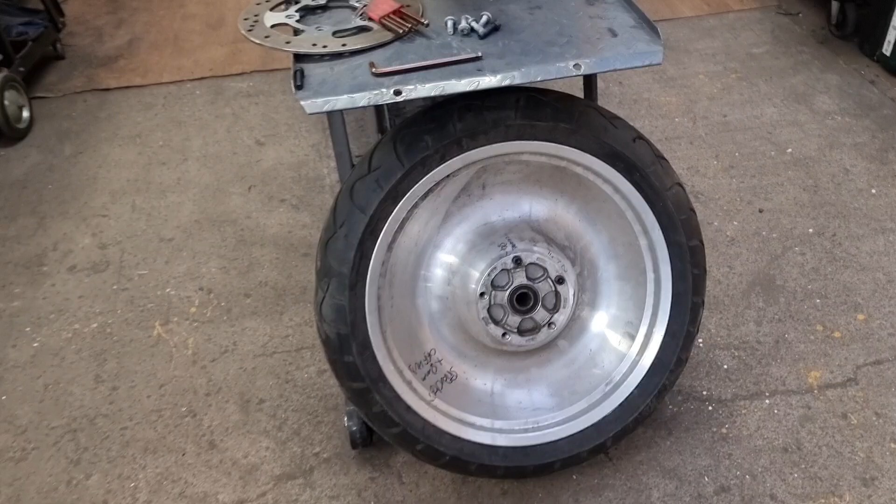Part 2 of our car's high neck Sportster wheel adapter sprocket build. Let's do it. Right, so we made an adapter that fits on the wheel to take the Sportster sprocket and set it out the right distance to line the drive line up. We now need to machine the holes in it to bolt it down. And there's a few ways of going about doing this and calculating this.

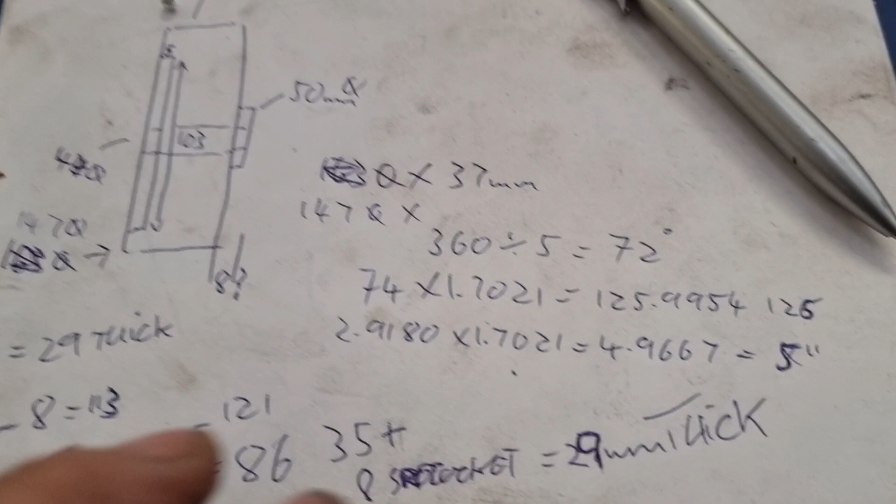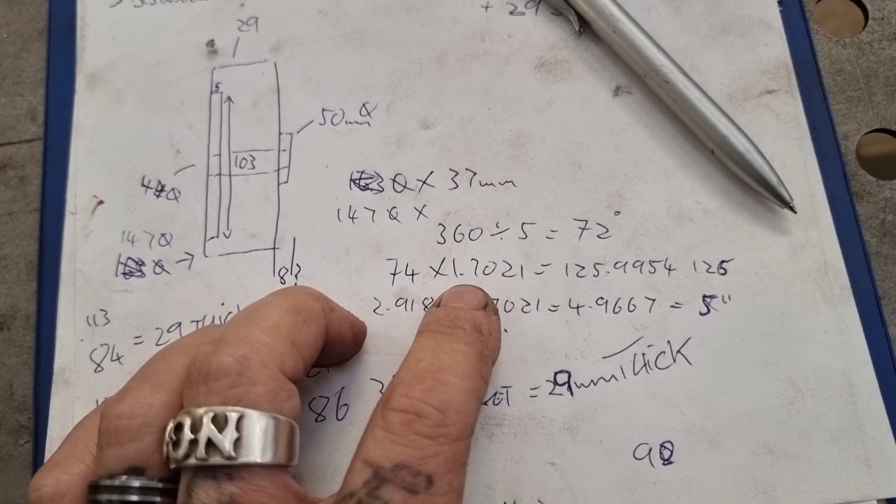We need to find the PCD for a start off. So there's a formula to work that out, and we measure the distance between the middle of the studs, which was 74 mil, near as fuck it is to swear in, or 2.918 in inches. What we do, we multiply that by 1.7021, and that gives us 125.995, so 5 microns off 126. Yeah, that's the PCD, the pitch circle diameter.

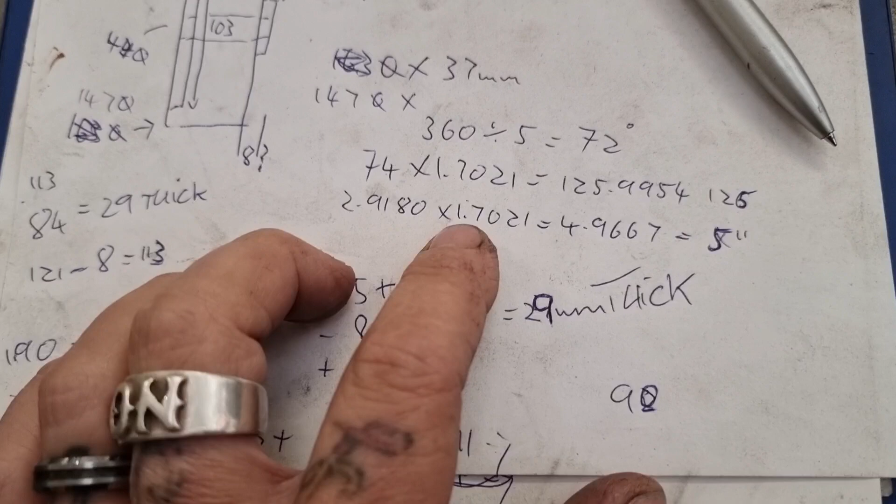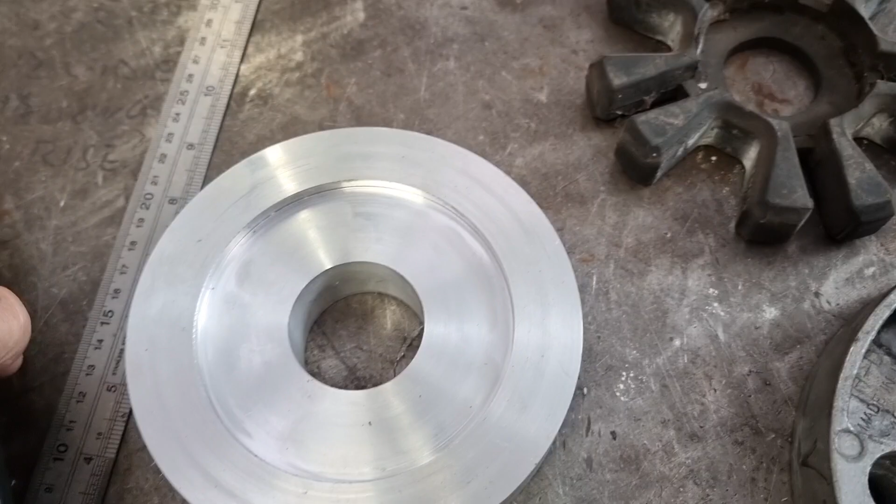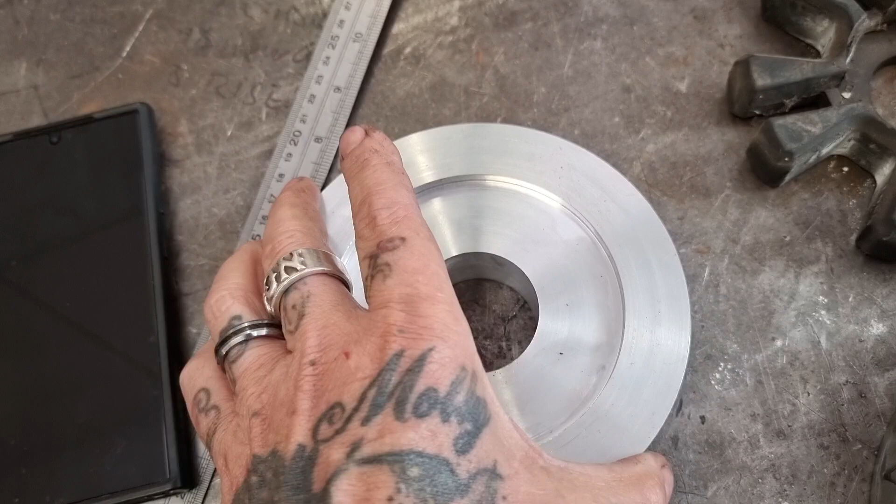Then we need 5 studs, so we divide 360 by 5, which is 72. So we zero everything off, make a hole, rotate this 72 degrees, do another hole, so on and so forth until we're back at the start. That, apart from the maths, setting this up on the rotary table and centering it and moving it out is a lot of fucking about, setting up, a lot of faffing about. So I think, look at the sprocket side, look.

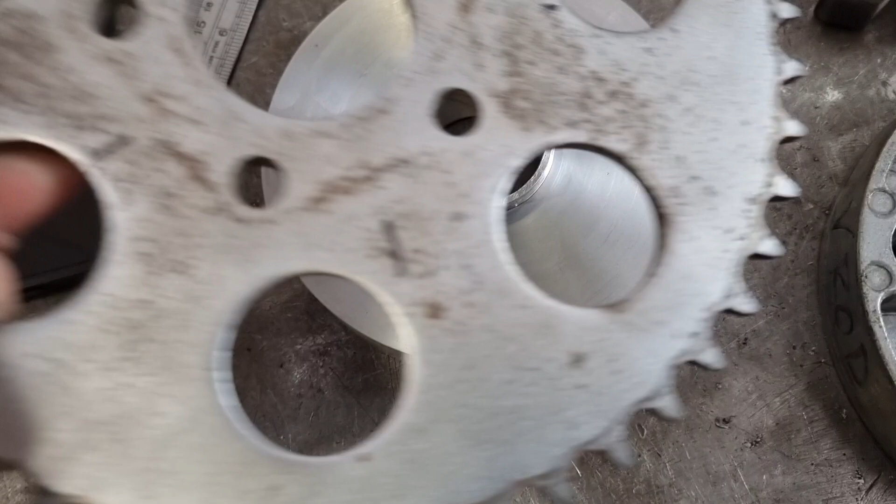What we're going to do with the sprocket side is none of that maths and none of that fucking working out. We're going to lay the sprocket on, and then we're going to transfer punch through, and that'll get us all the holes. Yeah, no maths, no marking out, no measuring, no fucking doing anything. Unfortunately, all we've got as a reference is this cush drive, and we can't center that on there as it is. That's not going to work.

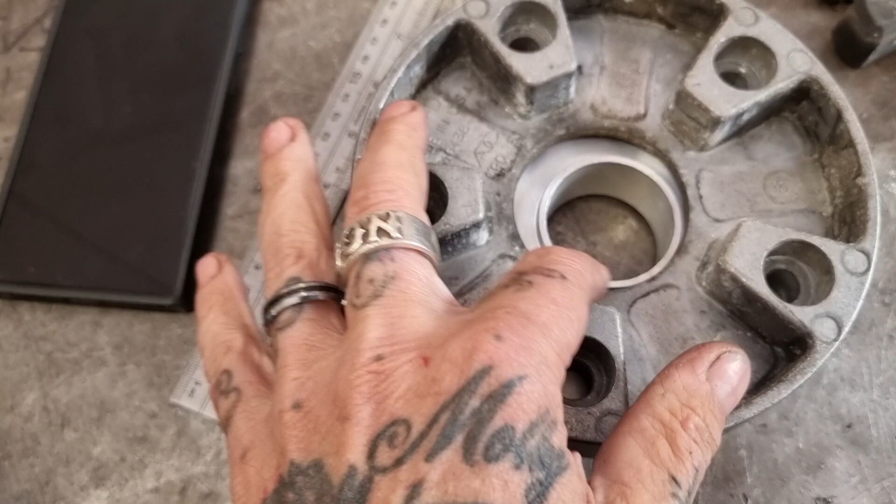So we've got two options. We can go for the rotary table setup, the full engineering job, which is a bit of a fuck about, like I've just said. It can take an hour to set it up on the rotary table, or we can just make a little adapter, a little mandrel that sits on there. Yeah, sits in that. The outer diameter is the same as that diameter, and that will centralise that on the adapter, and we can transfer punch that through, which is probably what I'm going to do. So 10 minutes on the lathe as opposed to up to an hour on the milling machine setting up, and then we can go from there.

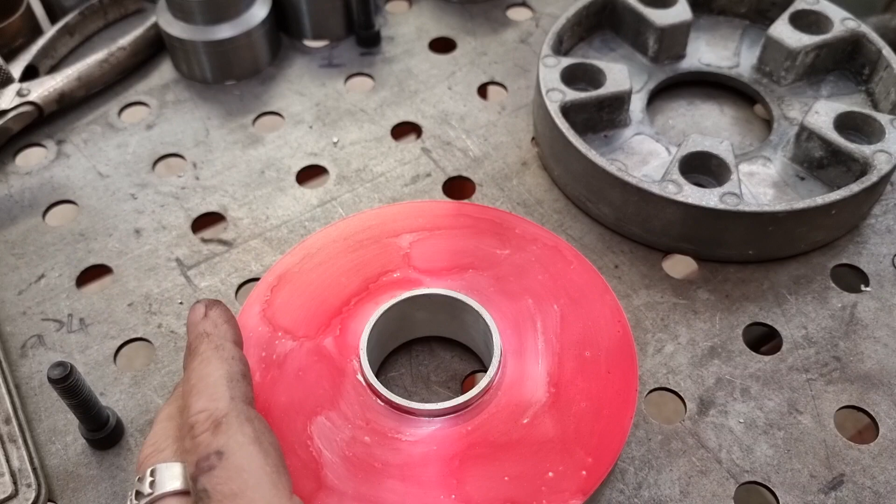Righto, so we've had a brew and we've had a weigh up of the shit involved doing each way of marking, drilling and tapping these holes. And I think we're going to rule out the rotary table. I think it's too much fucking about. I did consider it in case we end up shaping this to lighten it, but I think we're going to have a conflict with where the holes are when it comes to scalloping out. That will show later on in the process.

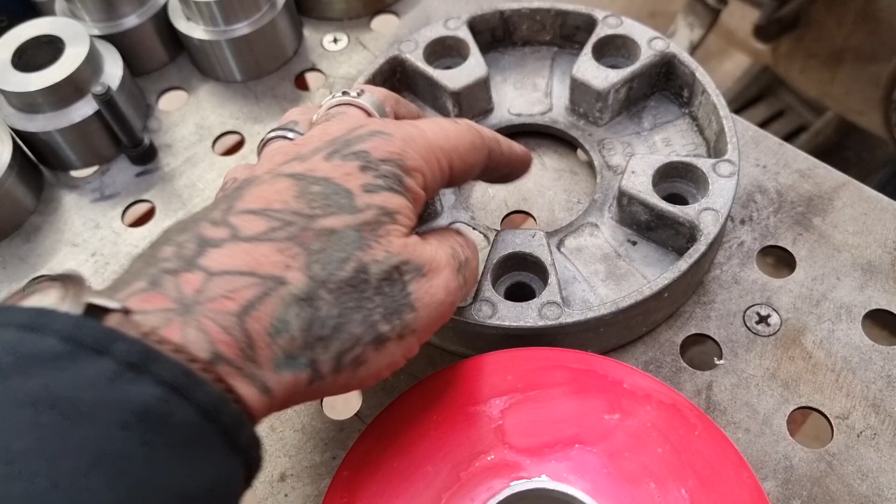So we're going to go with the mandrel. We're going to make a mandrel that fits over that flange and is wide enough to sit in there, creates another flange that sits in, and that drops on there, and we transfer punch through. I think that is the way forward, I really do. So let's get on and do it.

So we've got this chunk of material off. Hold on, let me just put the jaws away. And I don't mean false teeth, because we've gone back to the normal internal jaws, because we're gripping something that we can manage, and we are just going to face it up. Now I'm going to be boring a hole in this, so a lot of it is going bye-byes, but at the same time it'd be nice to have a good reference to start from. So here we go, let's just chop that nice and smooth.

And then we need to turn the OD down to fit inside that cush drive doodad, don't we? So we'll get a touch on, and we'll take a very light cut. Just checking everything's moving in the right direction, and then we'll have a measure and go from there.

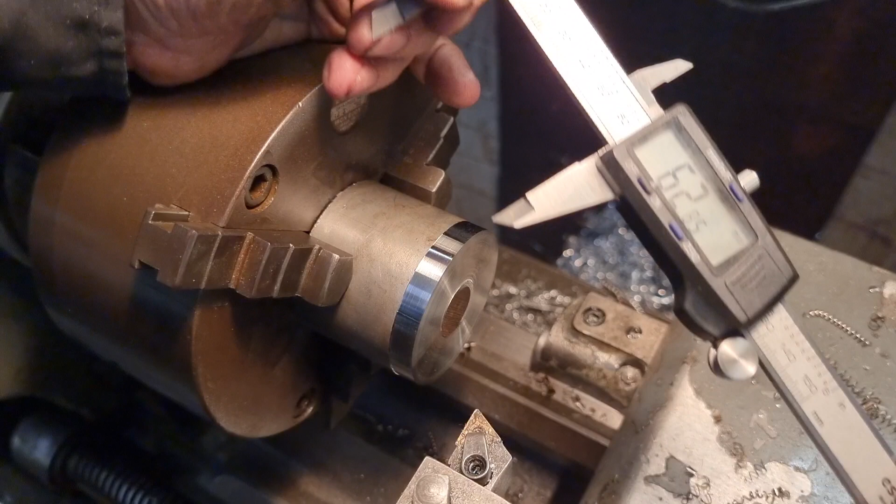Right, that is 62.85, so we'll set the digital readout. X is 62.85, enter, and we need, oh, it's really difficult to measure, but we've got 60.5, so let's take this down a bit. That's 61.6. It only needs to be about ½ inch long as well, so we don't need to go mad with this. And now we'll go 60.7. I want to sneak up on it.

I want it to be a nice fit. So we'll have a try. We'll go 60.7, look, like this.

Lovely bit of steel, this is. Cheers our Gilbo.

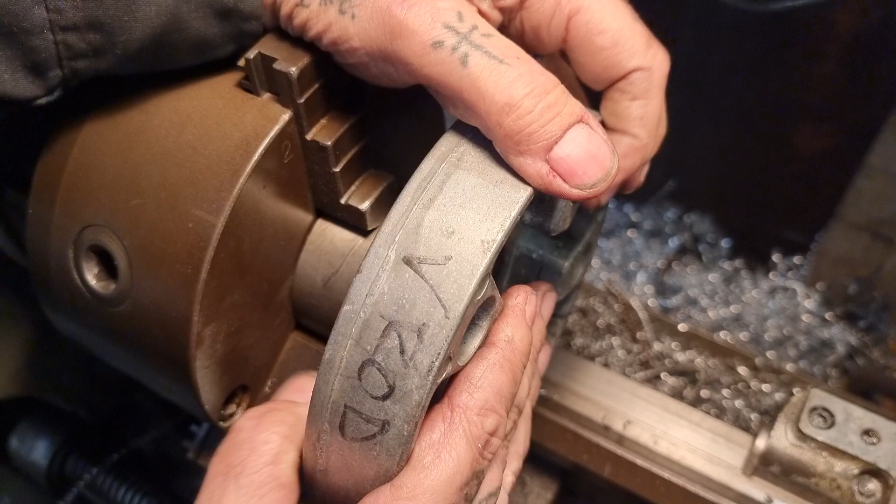60.7 at that. Right. We'll break that edge. And we'll hope there's enough clearance. Oh, there's loads of clearance on the bed. So that's 60.7. It almost fucking goes on, Ralphy. Like, almost goes on. So let's go again.

60.65. It's not got to be a press fit like. It just needs to fit. 60.65 there, look. Which shouldn't have done too badly. And where are we at now? Fucking hell, it tightens up. The problem is that this hole is not perfectly fucking round. So unless I'm gonna chuck this up and bore that out, I'm gonna make do with this.

So 60.7, 60.55, let's try that. See if that gets us a shove on fit like, ain't it? Like so. You know, that ain't far off, I reckon. Okay, go to 60.5, my original fucking measurement.

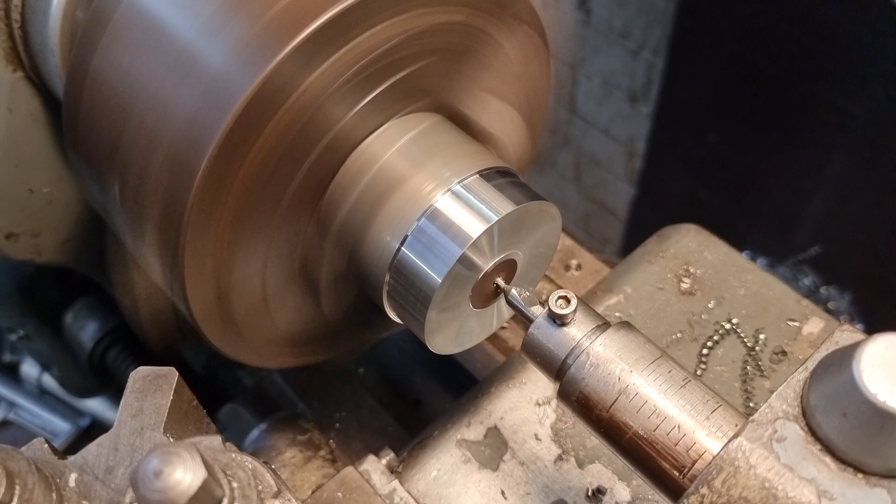Like so, we just get that lined up, get the end of the flute lined up, yeah, and we can see a mark on the tail that you can't see, and the part needs to be about 16 mil. So if we go a good 20 mil, that'll leave us plenty when it comes to getting the boring bar in. Well, getting a big drill in. We're going to rough it out with the biggest drill I've got before we hit it with the boring bar, because this needs to go out to like 50 mil or thereabouts.

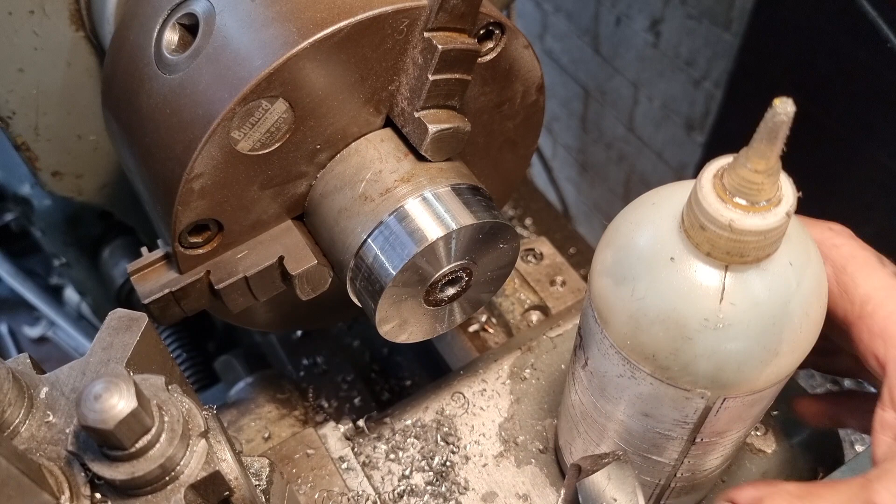Alright, now we're coming with the boring bar, so we'll just touch on. Zero that. We want about 16 mil. So we're just going to square off the bottom of the hole. 16 mil. Which ain't pretty, but there you go. So we know we need 16. And now we can take a light cut and then have a measure. Take this down to 16, where we were before. So we're nearly there. 15, 16, right. We'll have a measure and then set my readout.

Right, I've got this worked out to be 50 mil on the nose is what we need. And we're fucking off, just burnt my finger. 30.7. So X equals 30 point. Let me have another measure. Don't be so flippant there, young Ralph. It's not, is it, you see? Look. 31.12 we've got there. 31.06 we've got. It's really tight at 06, so I'm going to call it 31.

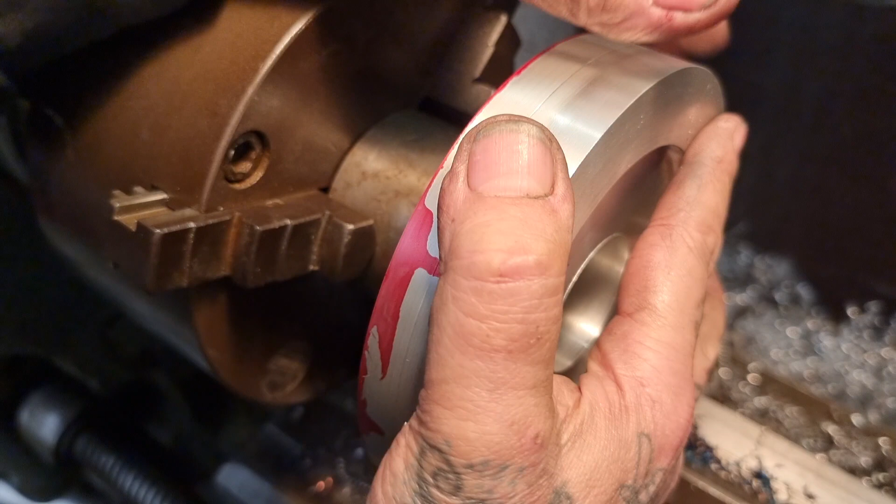Right, some bozo forgot to press fucking record. I took this out to a fraction under what I think I need. So we can now try this one. It is hotter than a pistol, so it's not quite fucking gonna go. It's just a bit too tight, so we'll take a skin pass. Excuse me. Down to that 50. Like so. And then we'll see how it sits.

And that almost fits. I just need to put a bit of a chamfer on that. If I can get it with this. Maybe not. I'll do it with my boring bar. Like so. There we go, that's got it. Quick clean up.

And now that is, fucking hell, there's nothing in that. That's a nice fit on there. So we'll get that parted off, and then we've got a mandrel so we can transfer the holes through.

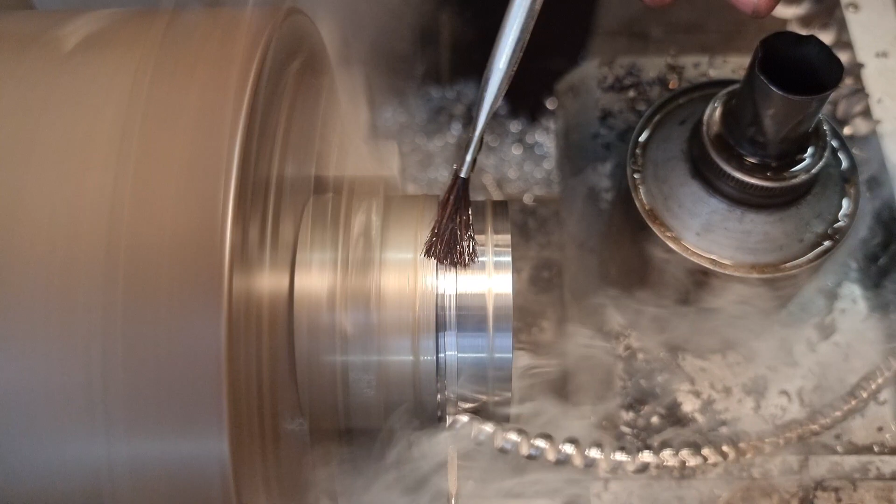We can get our part off. A little something like this. Come on, baby. Yeah.

Righto, so look, we've got that chuck held internally. So all we need to do is get rid of that fucking Raymond burr. It's hanging on there, look, so we'll have that away. That's it, that easy, yeah. And then break the edges so we don't cut ourselves up more.

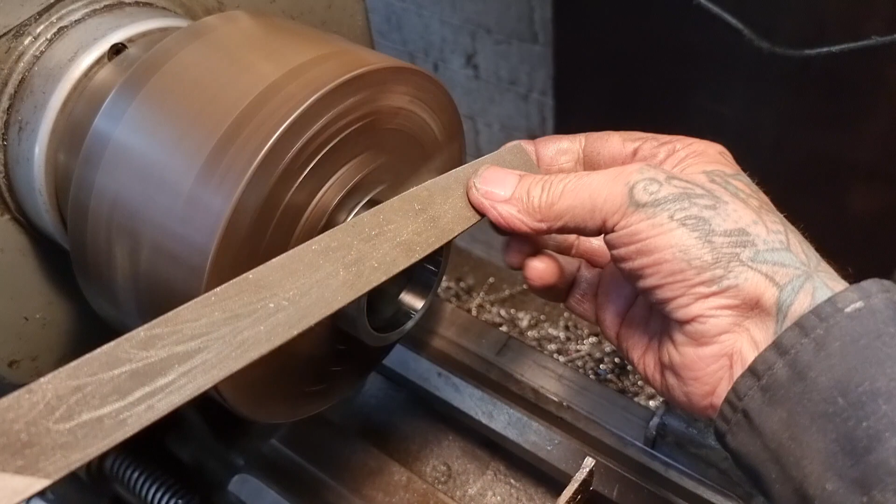Fucking poorly finger. I put that open last night, bled like full.

Not the best fucking deburring tool. That is one sleeve that we can use to mark the holes on that adapter.

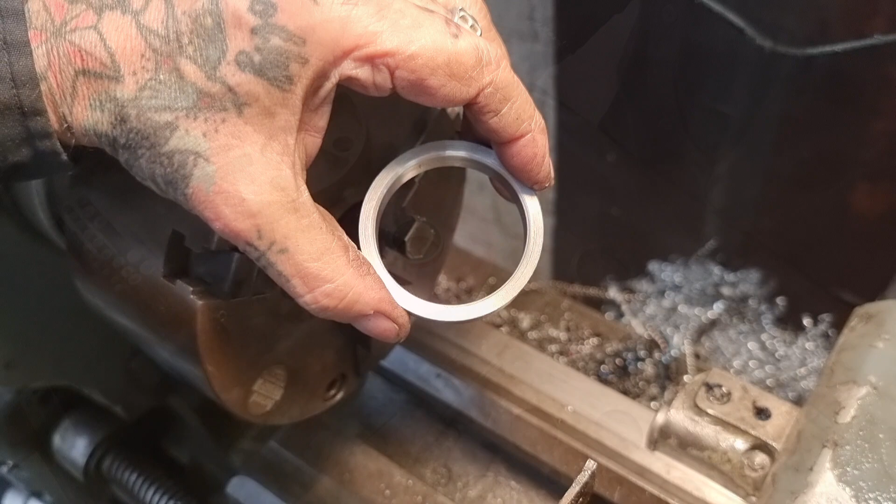Right, it's really awkward to set up to film, but I'm hoping you can see clearly. So there's my ring I've just made, it's all cooled down. That goes on there, like so. And then that snaps on there, like so. And we use a transfer punch, and I've had this through all of the holes to make sure that it clears. And it's quite tight, which is what we want.

Give it a tap, don't move anything now. For fuck's sake, don't move anything. Into the next hole. Give it a tap. Still feel it's in the hole, so it's not moved. Come round again. Oh, that one's tight, Ralphy. That one's proper fucking tight. Ain't it? There we go. In we go.

Tap it again. Just gently marking it. Fucking hell, that is tight. Gently marking it as we go. Let me check that that's still in the hole. Yeah, it is. Right. On with this one. Still in the hole. You can feel it's in the centre dot. So, last one.

There we go. So now we've got those 5 holes marked out. We can come with a proper centre punch, because transfer punches aren't made for making deep indentations. They're made for transferring, marking out through. And we've got those holes that need drilling through and countersinking to take these cap heads like so.

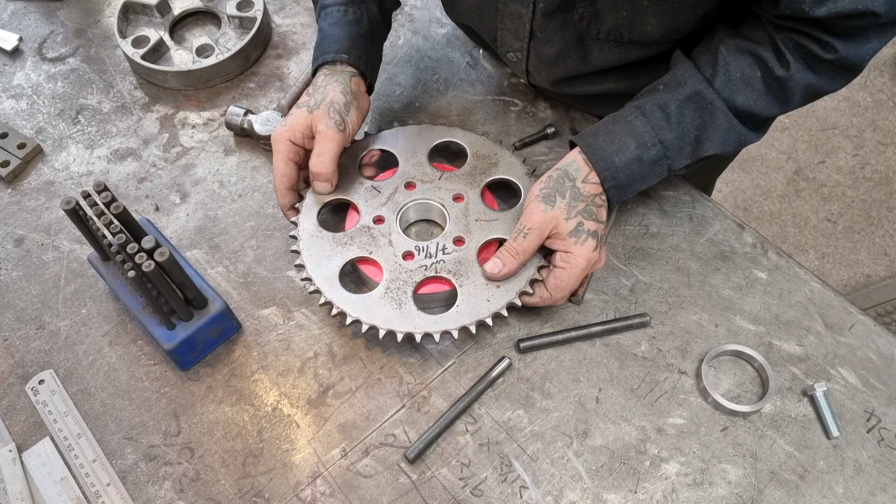Yeah, I'll mark it out, find the middle, job's a fish, and then we'll line up one of the holes with the middle and we'll see where they come. Right, you're not going to see this, but I'm right on the edge of 2 holes there, and I'm right in the middle of 1 hole there. I can see that is absolutely bang on where we need to be.

So again, the transfer punch, the right one. Tap. 2, 3, 4, 5, and there's those. So we've got our 10 holes all marked out. Just where we need to be.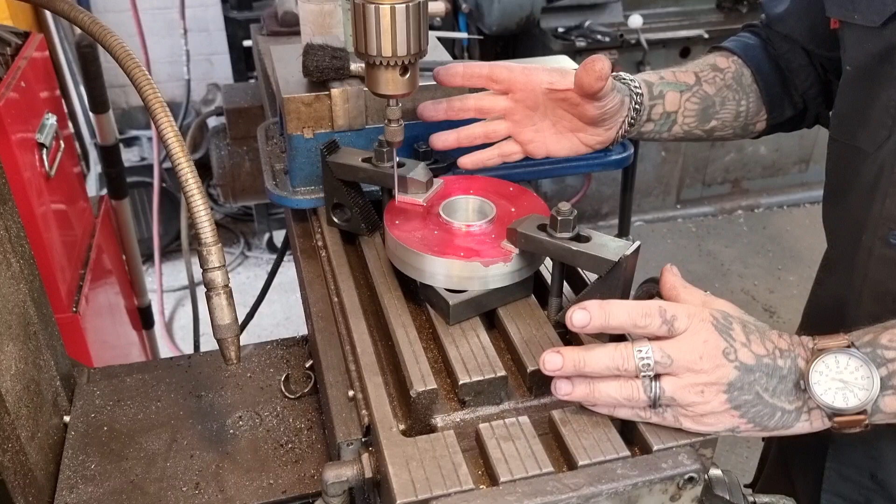Okay, so here's the setup, look. We're not going to use the vise, it's not going to hold this very well and it could mark it up. So we've set it on some standoffs with the old toe clamps with a little bit of aluminium packer to stop marring this surface.

And we've got the wibbly wobbly on the job, and we can line that up very accurately on that centre mark. We're right in the centre of that centre mark. You probably can't see as well as me. Then we can zero out the digital readout, lock all the beds off, and we know we're ready to machine that hole.

Right, we're going to concentrate on these outer ones. We're going to have to move this around a few times, and it's not easy to get clearance for the holes. We might get that, we won't get that, we might get that. But we don't want to lose track of the fact that they're different. So the outside ones are the ones that bolt on the wheel, and they take 7/16 UNC cap head. So we need to drill that out.

It might be 3/8 actually. Here we go, look. I've set all the tooling out, so we're good. 3/8, so we're going to drill that out 10 mil. We're going to pilot it first with a 6 mil, or thereabouts. So, just need to take my stop down. And hopefully, I've got enough travel. I've not got enough travel. Bear with.

Right, we should have enough fucking travel. Everything's locked off, like I say. Let's give it a dab of lube. Dab of the old anchor lube. Huge hits with Americans. And run this through. We could speed it up a bit, but there's no rush. Nice and steady all the way through. Bit more lube.

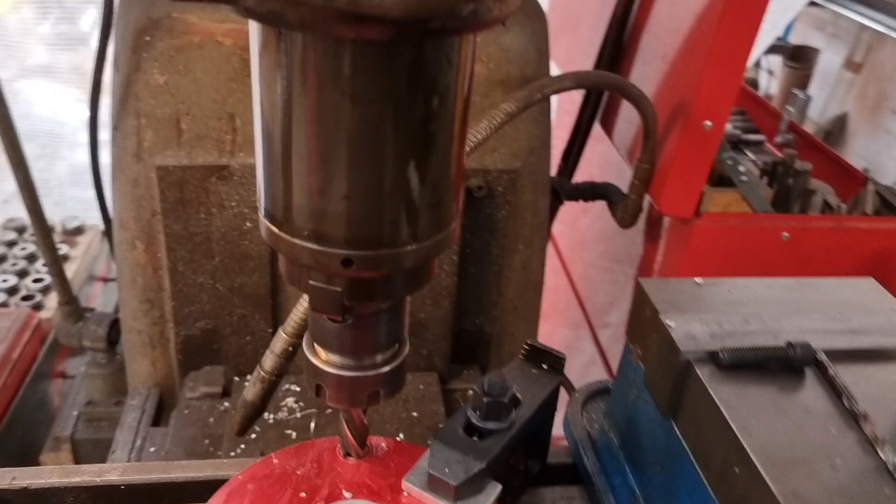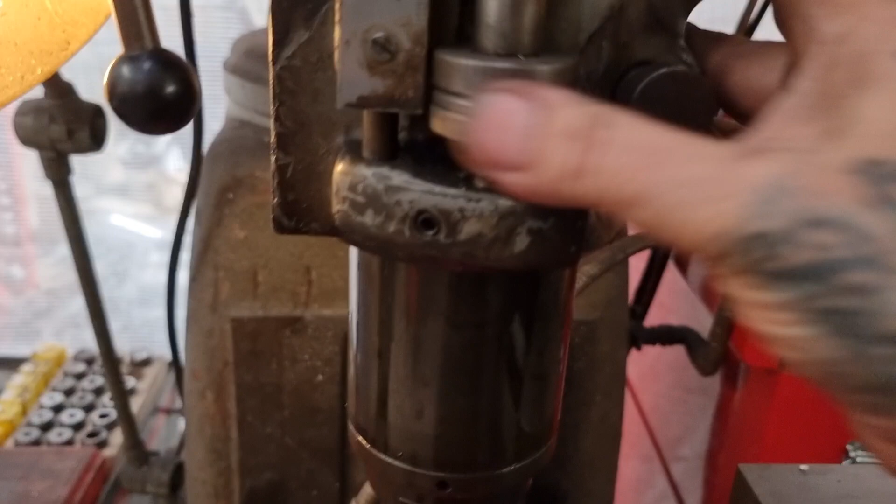What we're going to do with this one is we've set the cutter in. We're going to bring the quill down till it touches. Just touch on like that. And then we're going to bring the stop up so we can't go any further than that. Right, so bear with me, hold on. Alright, like so it can't go down any further. That's set at that. And now we wind that back up out of the way.

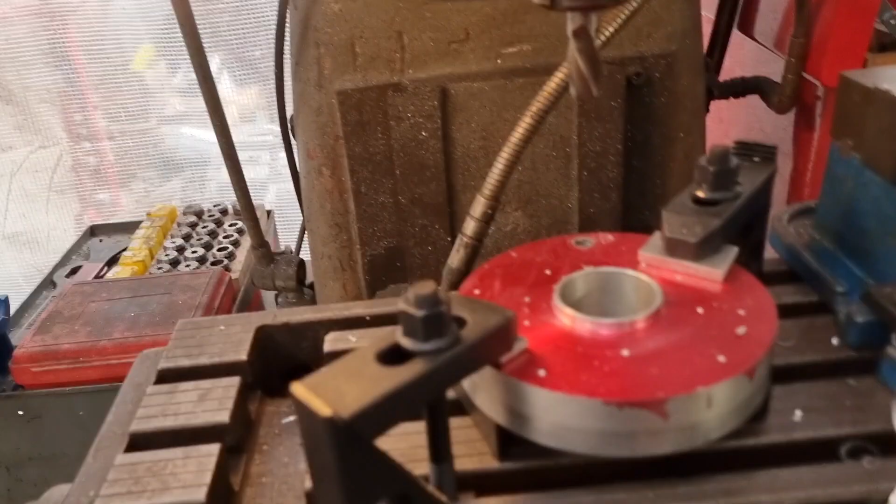And we lift the knee up, we lift the job up, the 10 mil that we want, which is 400 thou. Now each turn of this is 100 thou, so 4 turns of the handle. Look. So we'll go 1, oh sorry, not filming it very well. 2, 3, and on to 4. Come on, baby. Here we go. Hit that 0. Like that. Come on, focus. There we go. A little bit more.

And then we lock the knee off with the footsie lock. And now, when we bring that down, it'll go 10 mil below the surface of that when it hits the stop. So that's it. That's that setup. Righto, let's have that out of the way. Full disclosure, I've just changed the cutter because not only was the one in there left hand, but it was dull as fuck. Anyway, you've seen the setup, let's fucking have it.

So we'll touch on and then we've got 10 mil on the stop, with a little bit of lube. That's what separates us from the animals, boys. And away she goes, look. We should take it nice and steady. Down to that stop. A bit more lube, please, sir. Get rid of the fluffies if you can. If not, fuck it. Just send it. There we go.

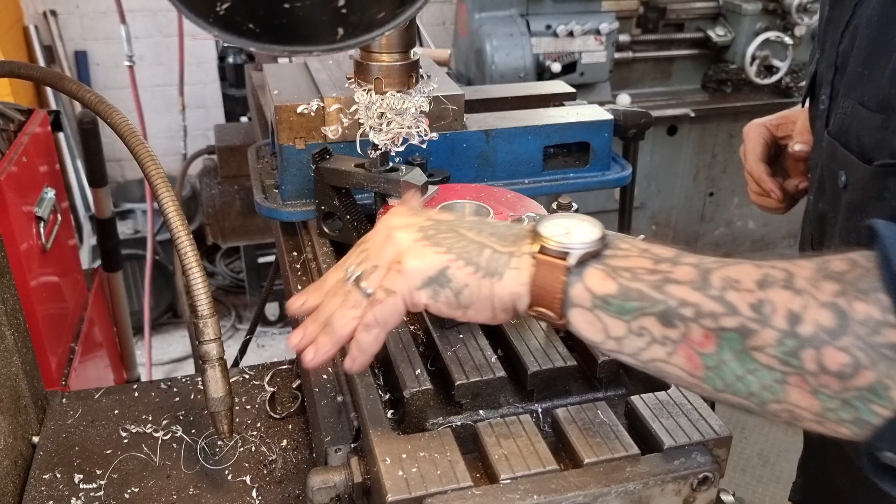So now, if I can blow that out. We've got one hole. It'll take one bolt. That's 4 more to go. I can reach these back two, but you're not going to see it where the camera's set up, and you're going to be bored shitless, I think, watching me do that. And then I've got to reposition it to do the remaining 2. I think I'll get you to join me again when we're doing the inside ones that need drilling and tapping.

So the moment of truth, having done all 5, is whether it fits, and it fucking does. Yeah, I've got that on, and they're just nipped up. They all go in, it all fits on. Everyone's a fucking winner. I would say these bolts are a tad on the short side, but longer bolts are not a problem.

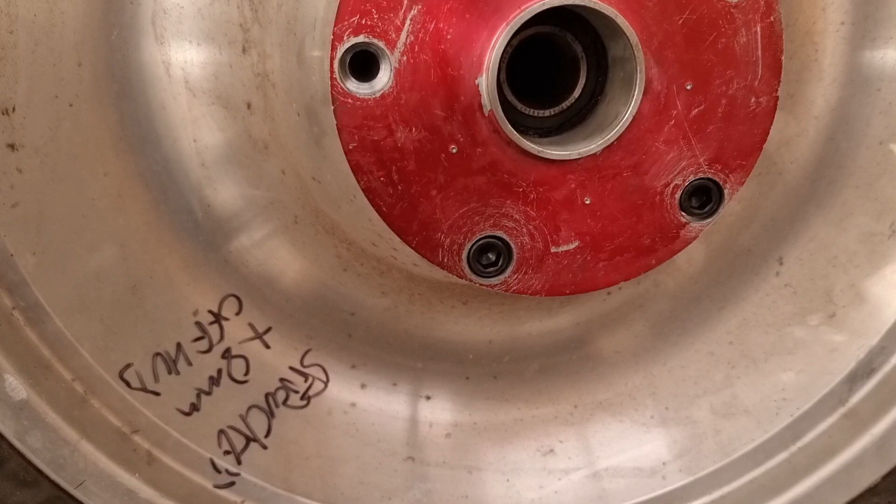I thought about counterboring a bit deeper to compensate, but that's just fucking daft. I mean, they cleared the surface, which is what we want, and that extra, fucking hell, is that the jugular? That extra bit of meat is not a bad thing, like. So yeah, that is halfway done now.

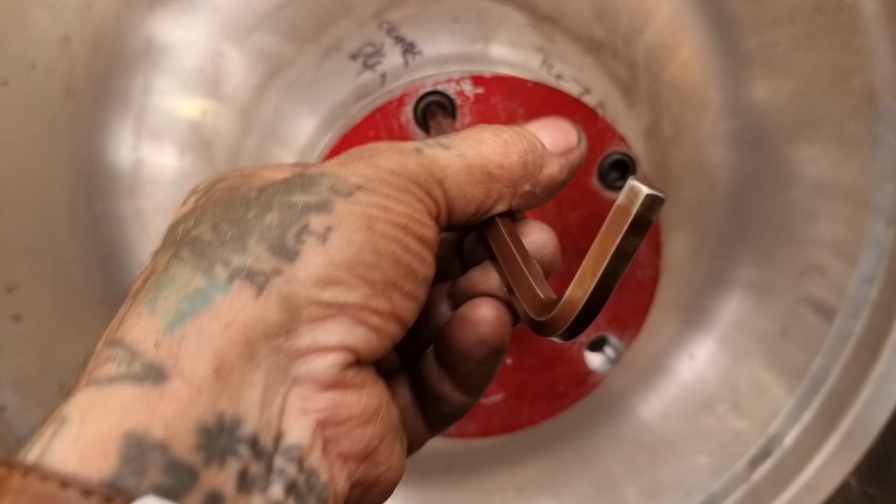I've checked the editing, and this video is getting long. I'll show you the setup for one of these, like I did for one of these. Very much the same, just a different hole in it. We need to tap that out, 7/16 UNC, if I recall correctly. So I'll get this off, I'll get it back over to the milling machine, get my tooling sorted out, and then you can see me do one of them, and we're about there, aren't we?

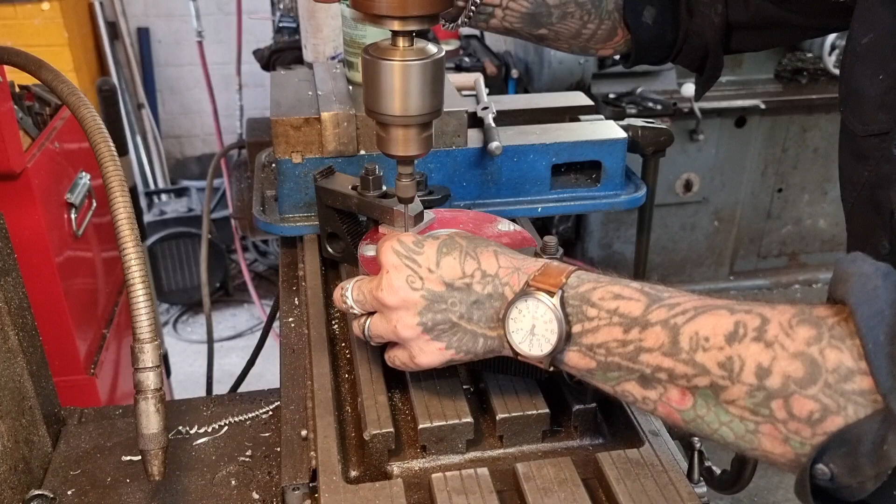Right, so we're back on the table. We've got a wibbly wobbly in. Never use your fingers to reset one of these, because if you knock it, it'll do like a fucking whip. We're going to line that up as per with that centre back. This is not quite there. Back a bit. Pull that up a bit. Yeah, I'll set that. Right, have that out.

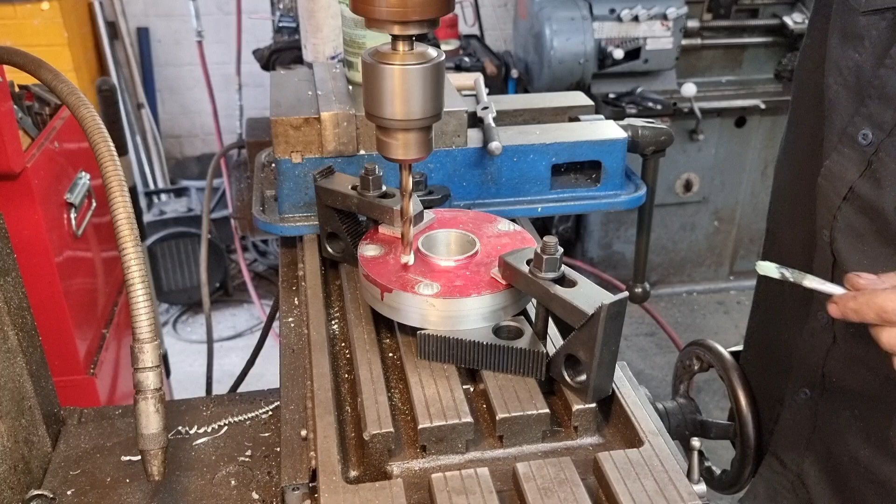And we're going to go in with a 3/8 bit, which is the tapping size for 7/16, so I'm not going to bother with a pilot drill on these. I reckon that'll be just peachy. Grab a lube here a bit. Move your hand around. There it is. Come on, bastard. And away she goes, Captain. Nice and steady away. A bit of lube as needed. And soon have that through.

I'm not sure where it's going to come in regard to that register that we machined in the back. I think we might be close to the edge of it, but it don't really matter. In fact, it don't matter at all. Right, with that out, we can now change that out and give this a bit of a lead with this chamfer tool. So, quickly. Right, so just a touch. Yeah, a little bit more. Lovely stuff.

And then I'm going to swap it out to a tap, but I'm not going to attempt to power tap it. I'm just going to use the fact that we're all set up on the table, he says, secretly tightening the table down, which you should have done before, to line this up. So we'll just put it in there, give it a dab of lube, and we'll get it started, and then it will slip in the chuck. And we'll get ready to stop it as soon as it bites, pretty much. There we go. Right, so that'll be straight. And when it will be started, we don't fucking know.

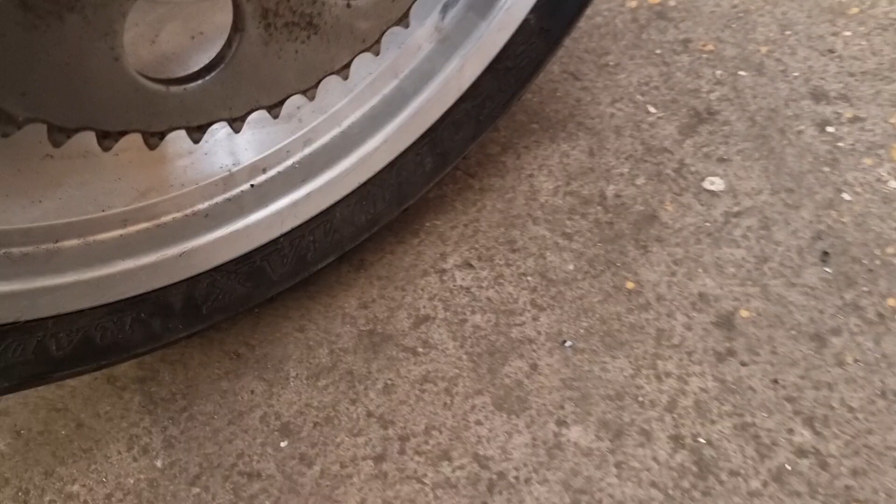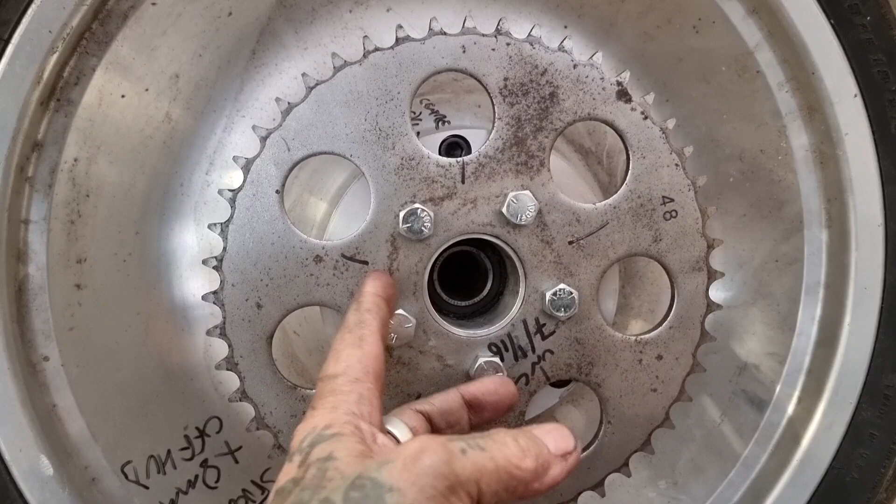And there we fucking have it. So we've got the V-Rod hub with the spacer to take a Sportster sprocket to line it up with that offset gearbox sprocket. Now I did think about, could have shaped these out like I did my disc spacers on my Triumph, but I can't. Look, it just don't work out. We can't cut a rib around it either because these are close to the edge. We could pocket some holes in it, but you're never going to see it. What's the fucking point? So hey, happy days. I'm going to call that fucking done. So there you go, we got there in 2 episodes, nothing too fancy, but nice and sleek and doing the job, yeah?